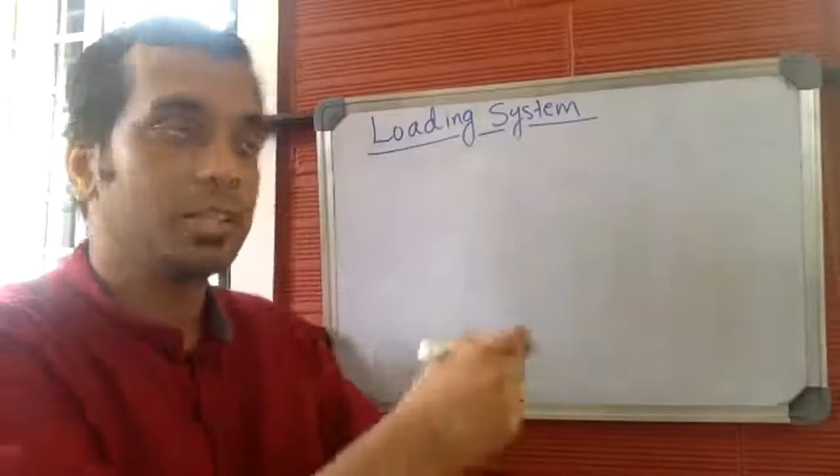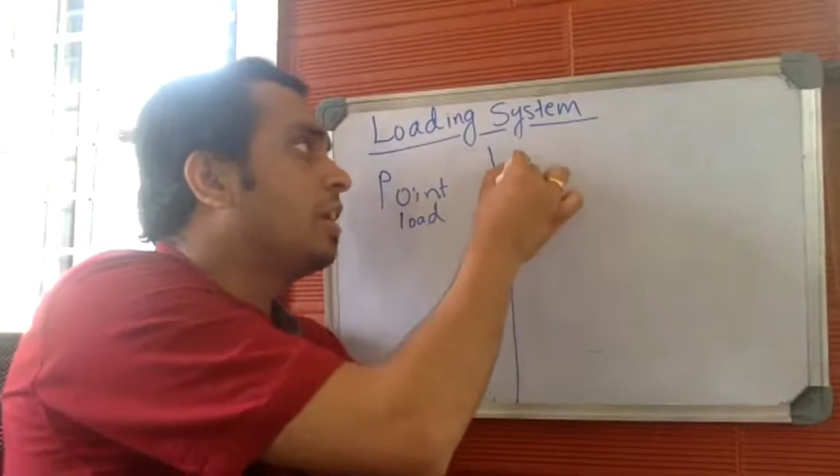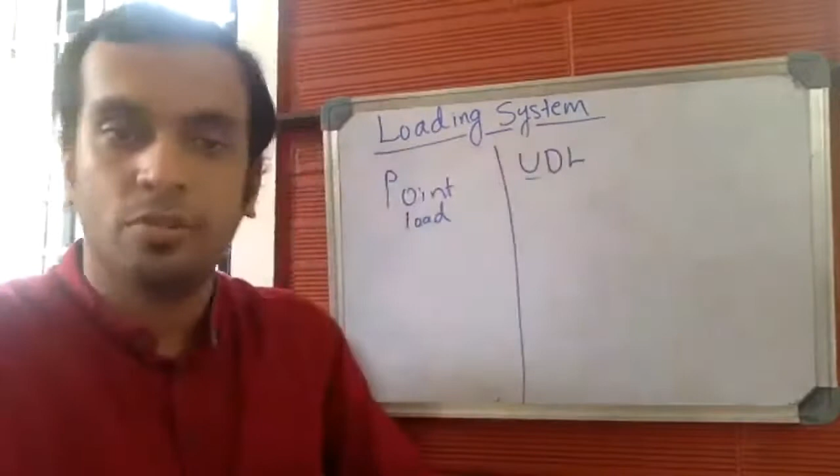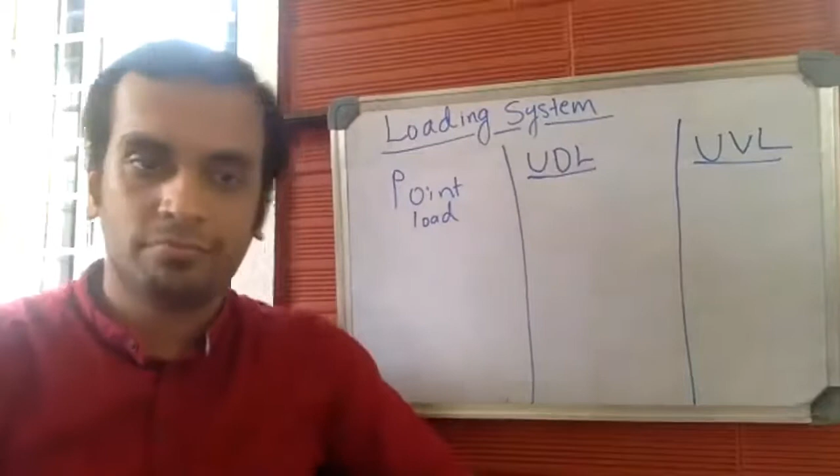So basically, we have three types of loading system. The first type is point load. The second type is uniformly distributed load. We call it UDL, uniformly distributed load. And the third type is UVL, uniformly varying load. So the first type is point load, second type is uniformly distributed load, and the third type is uniformly varying load. These are the three types of loading systems available.

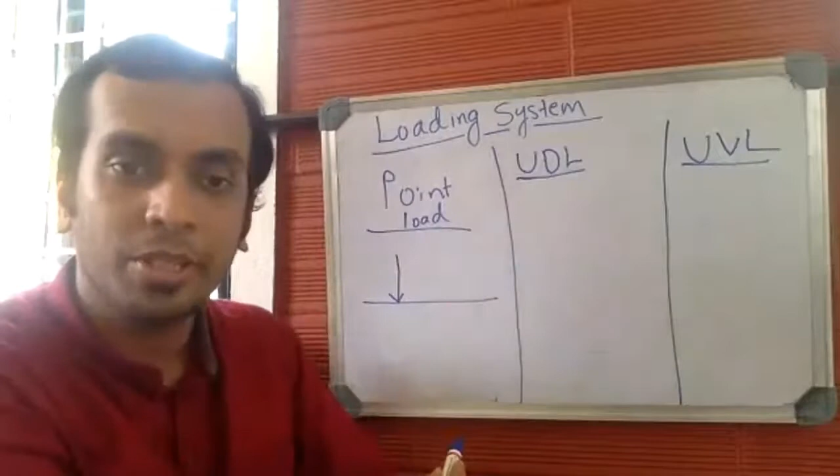So let us start with the first one. The first type is point load. You know what point load is. You went through point load in the previous modules; in the first and second module, you had point loads. Point loads are nothing but forces or loads acting at a particular point, or concentrated on a particular point. It's also called concentrated load.

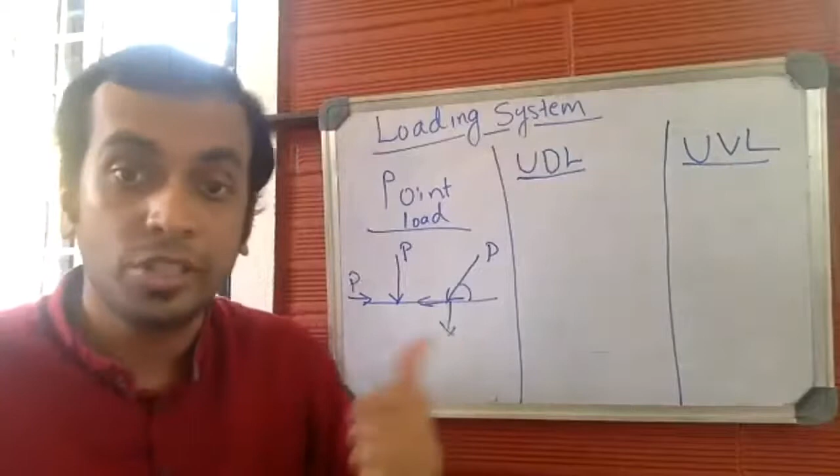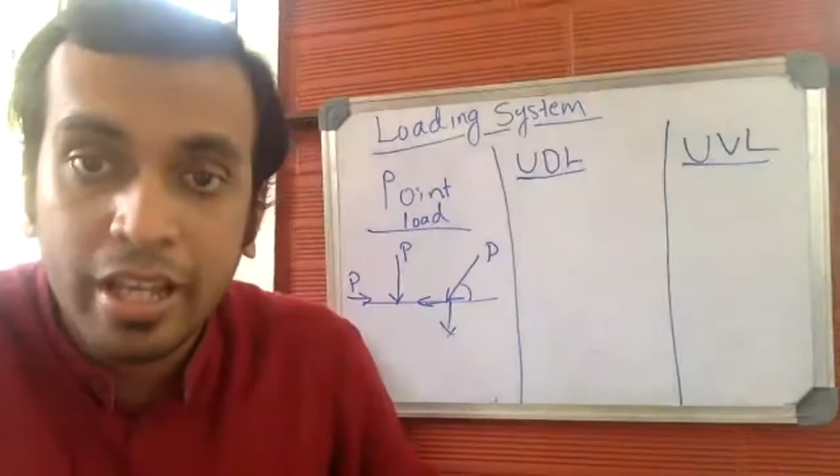It can be either vertical, horizontal, or inclined. You went through this type in the first and second modules, resolving the force into its horizontal and vertical components. If the loading system is a point load system, it's always easy to analyze. You have two more types of loading system. The first of these two is uniformly distributed load. So this is all about point load. Let us concentrate on uniformly distributed load, which is a new concept for all of you. So listen to me very carefully.

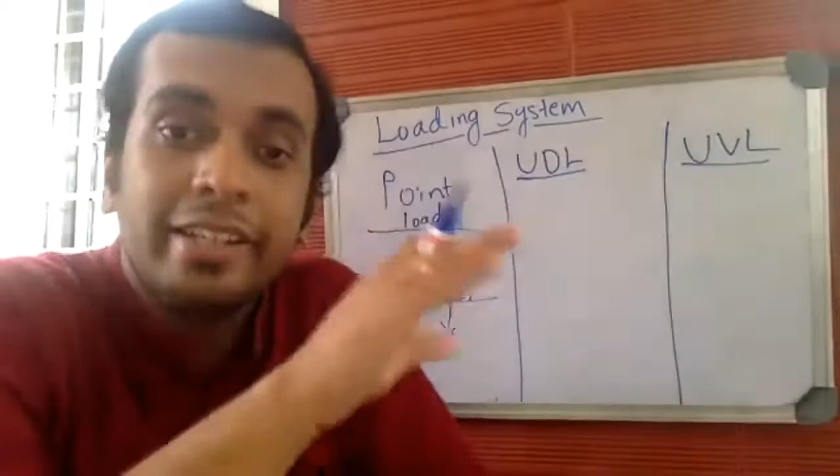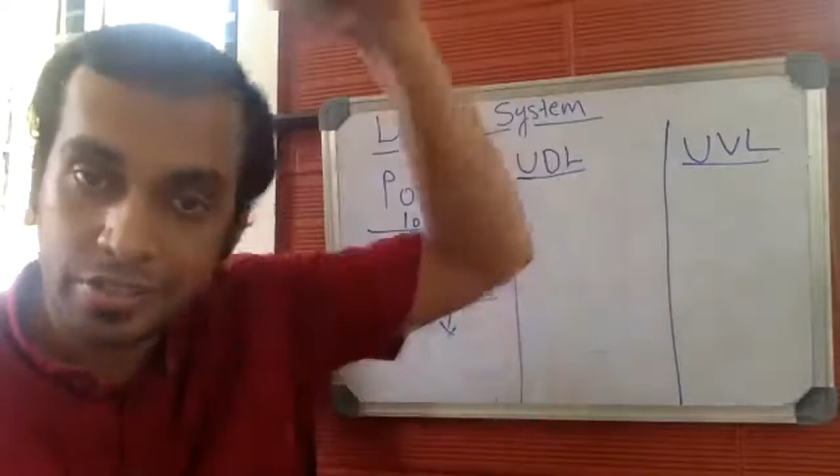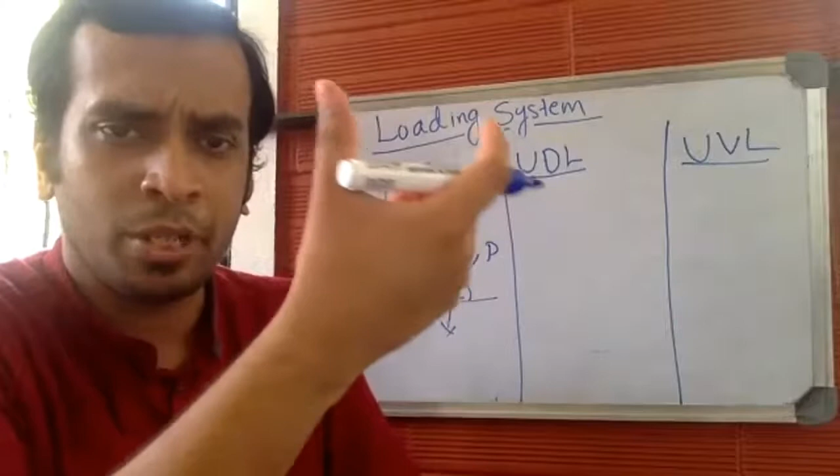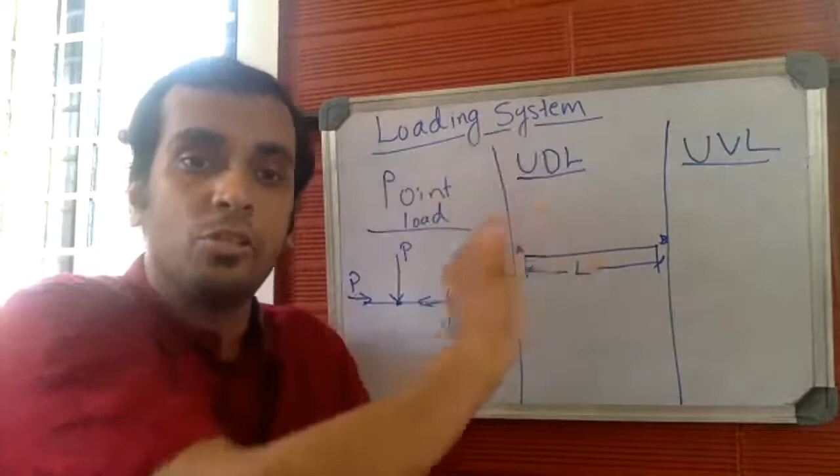The second type is uniformly distributed load. As the name suggests, the load is uniformly distributed. Whereas in point load, the load concentrates on a particular point, here in the case of uniformly distributed load, the load is uniformly distributed throughout the cross section of the beam or throughout a particular span L. Let this point be A and let this point be B. So here, this is uniformly distributed load. The load should be uniformly distributed throughout the span, which we have considered as L, indicated in this way.

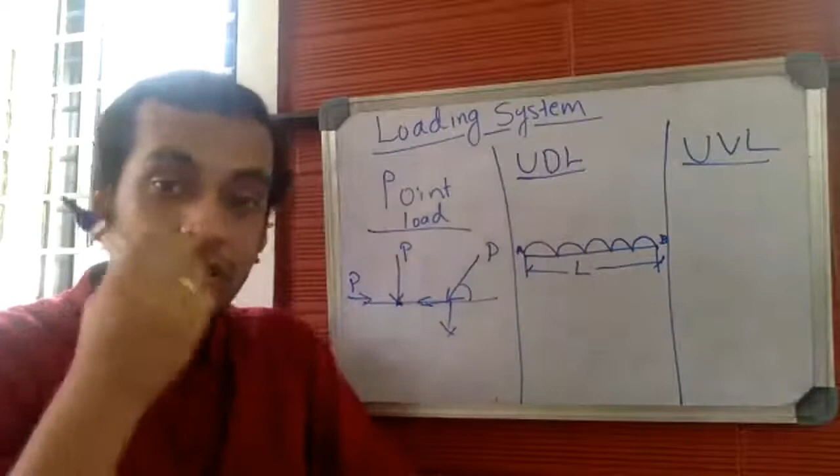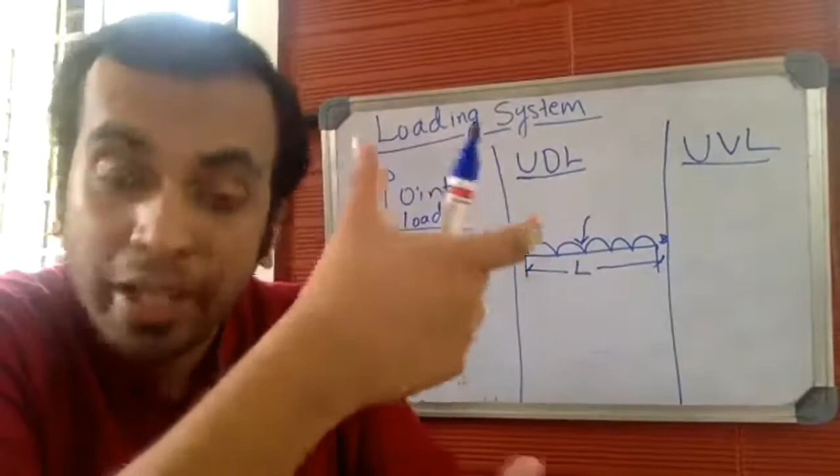Load is uniformly distributed. It doesn't concentrate on or act at a particular point. Instead, it uniformly distributes throughout the given span. So distribution is shown in this way. And here, the rate of load distribution is given. You will not be given the exact magnitude of load, because the load is uniformly distributed throughout the span. That's why you'll be given the rate of load distribution.

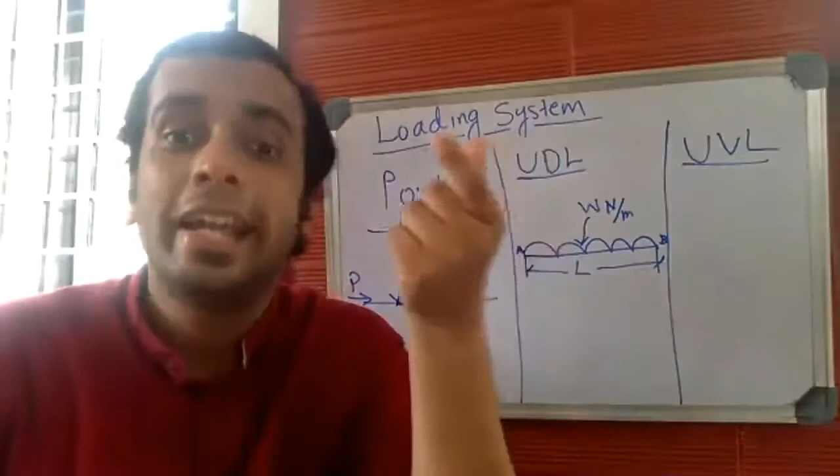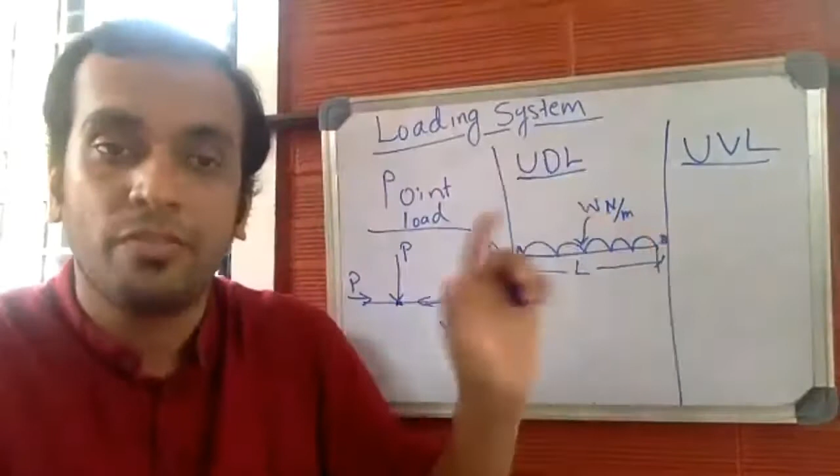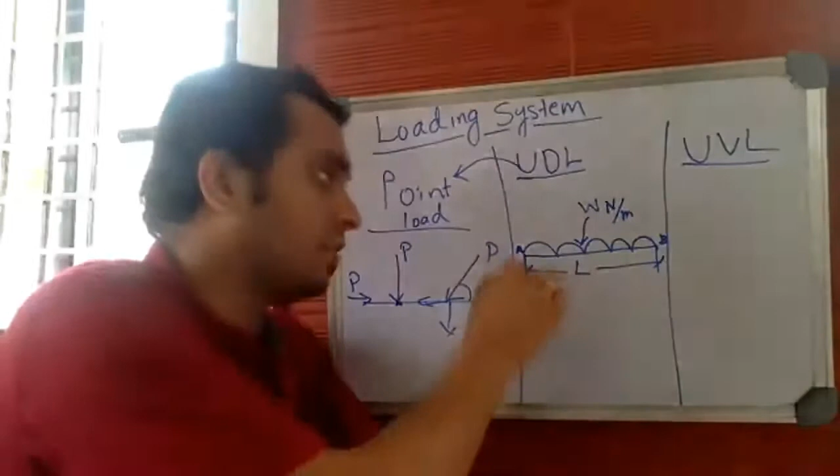Let me consider it as W newton per meter. Newton per meter indicates the rate of load distribution, the rate of the uniform distribution of load. Now, this is how uniformly distributed loads will be given. So if UDL is given, what are we supposed to do? If UDL is given to you, you have to convert UDL into a point load system. Let us convert it. I'll help you to convert.

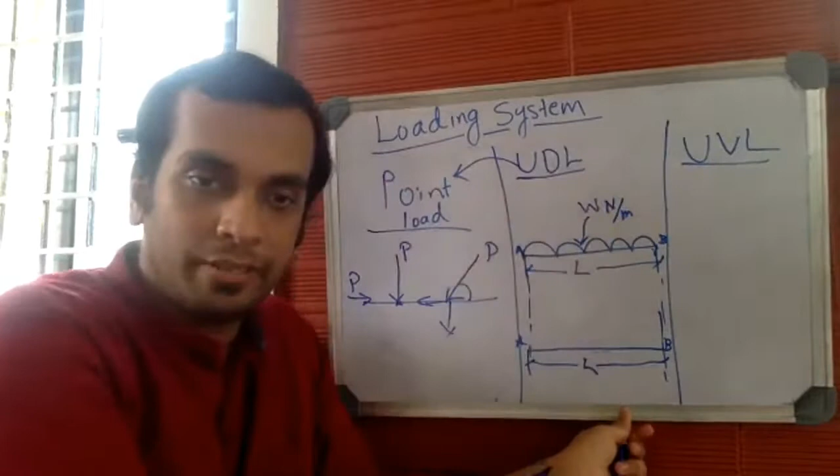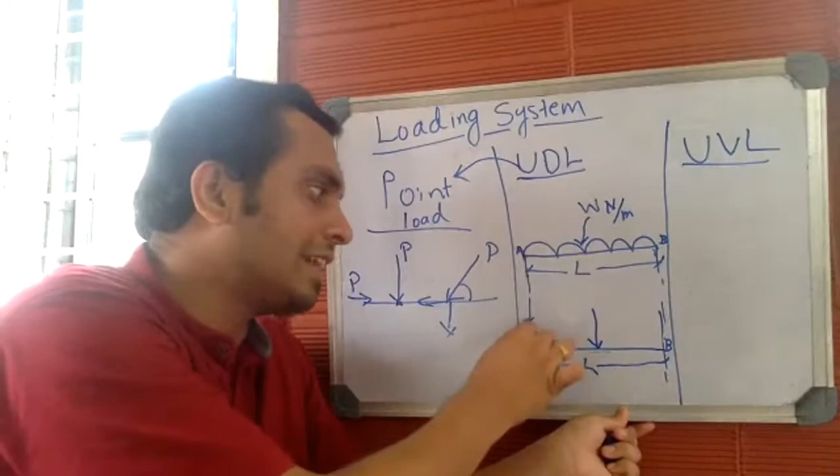Beam AB of length L. This is the rate of load distribution shown here. You have to convert the UDL into a point load, in order to analyze it properly or to make the analysis easy. So this is how you convert UDL into a point load. The point load you convert from UDL should act exactly at the center of the span, so at L by 2.

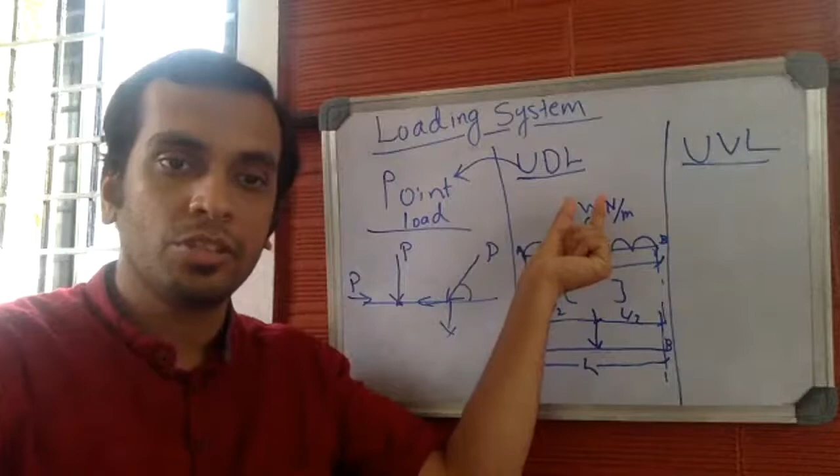And the magnitude of the point load you convert: W is the rate of load distribution, so the magnitude of this point load will be W into L.

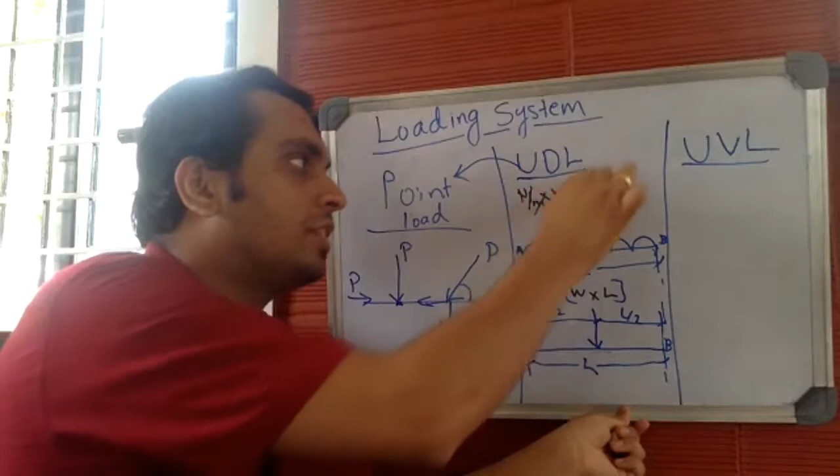Will be W into L. So how is it W into L? W is in Newton per meter, and L is in meters. So this gets cancelled and finally you will get the load in terms of Newton. This is the magnitude of point load. This is how you convert from UDL.

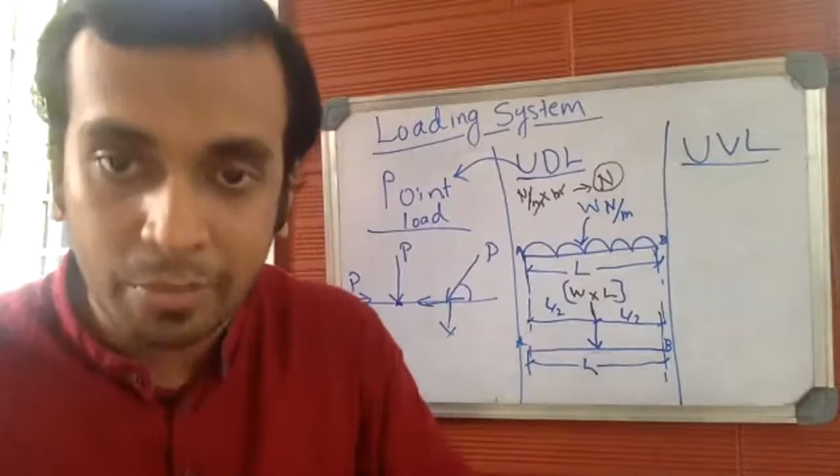So if UDL, uniformly distributed load, is given in the problem, you have to convert UDL into a point load. This is how you convert UDL into a point load. The point load which is being converted from UDL will act exactly at the center of the span. So this will be L by 2 and L by 2. And the magnitude of point load will be the rate of load distribution, W, into the span length L.

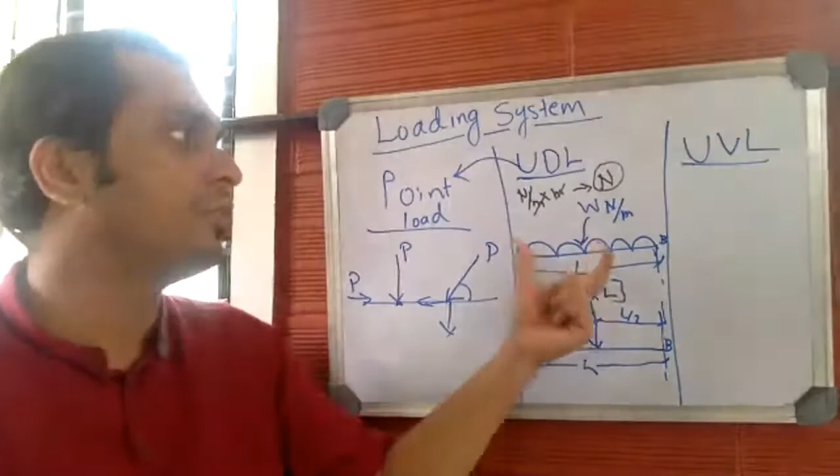So if UDL is given, you have to convert UDL into a point load. So this is all about uniformly distributed load. Now let us go through uniformly varying load, the last type.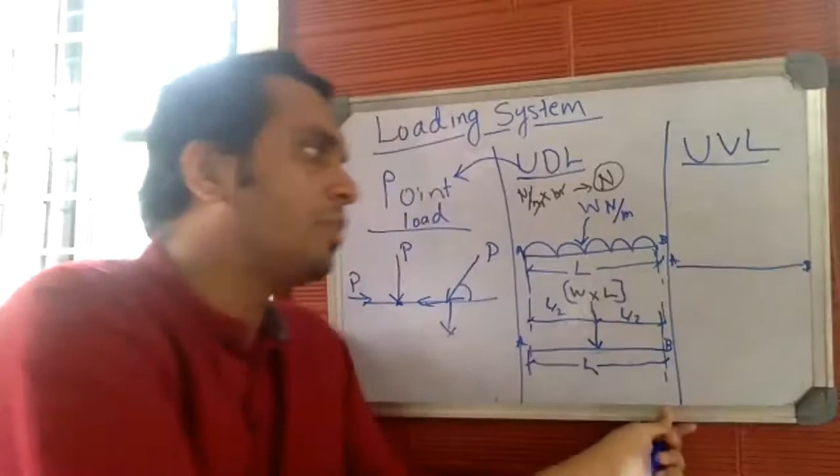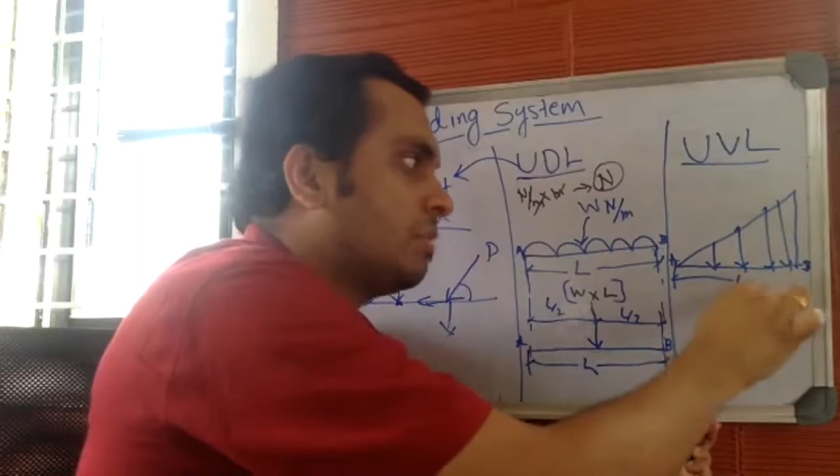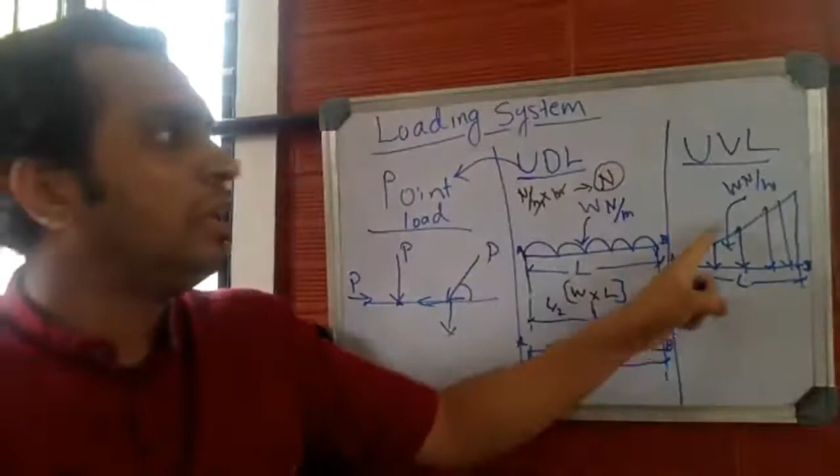Uniformly varying load. Let me consider another beam cross section, AB again. In UDL the load is uniformly distributed, but here the load is uniformly varying. It varies uniformly throughout the cross section and it will always be indicated in this way. This is a beam of span length L. W will be the rate of load distribution, W Newton per meter. Here the load increases from point A to point B in a triangular pattern.

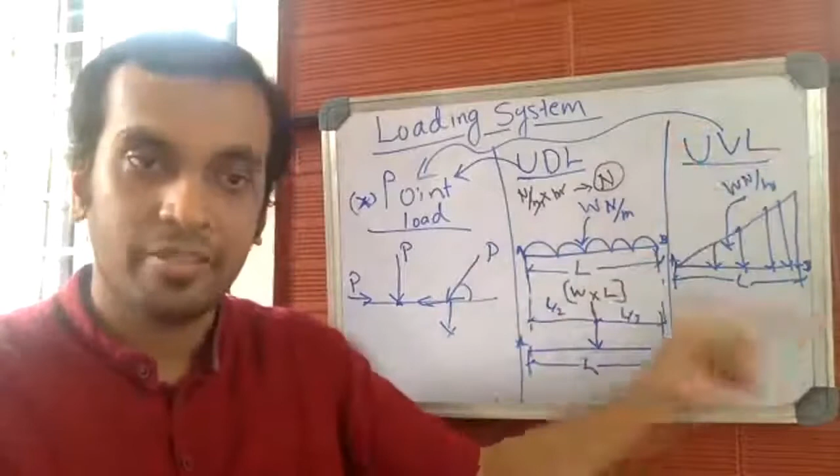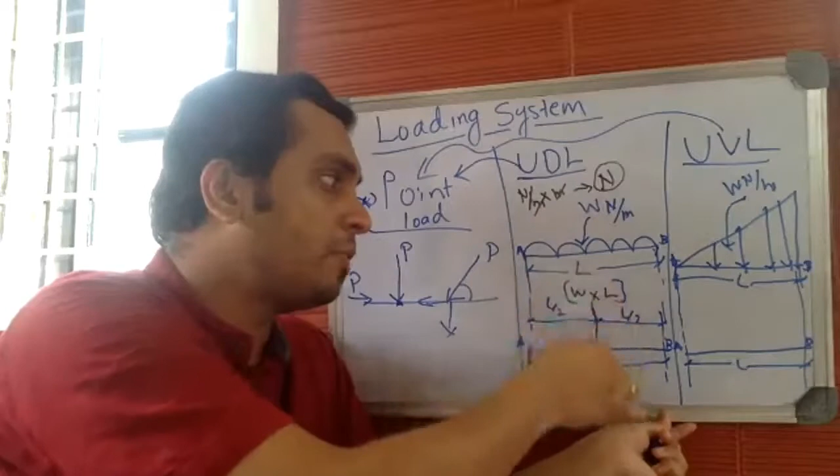So if you have UVL, let us understand how to convert UVL into a point load. Let me consider the same cross section again, AB of span length L. In UDL, the converted point load would act exactly at the center. But here it's not the case. It will not act exactly at the center. It will be acting at a distance of 1/3 from base and 2/3 from apex.

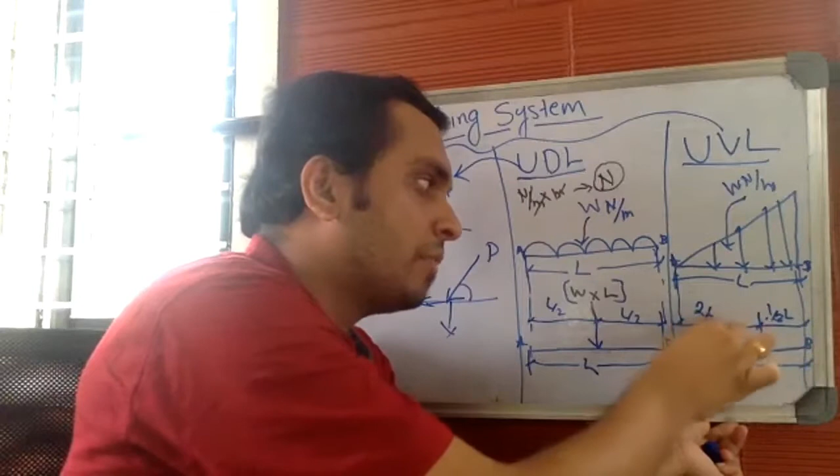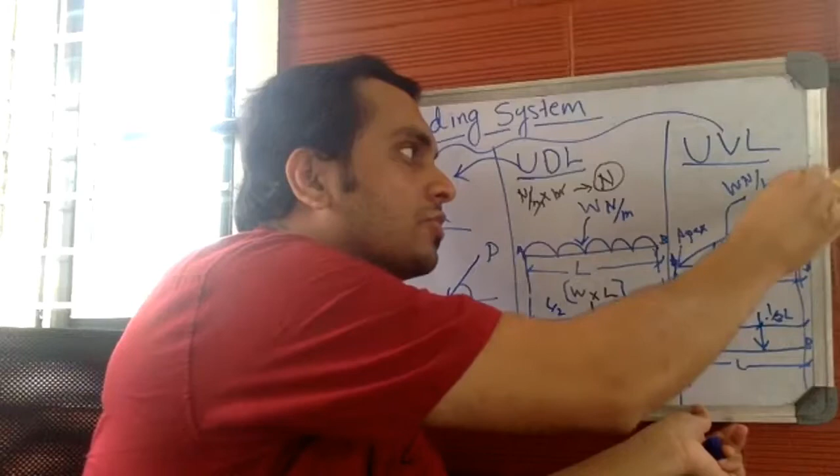So if this is a triangle, I'll let you know what base and apex is. This will be the apex and this will be the base. So the point load acts at 1/3 of L from base and 2/3 of L from apex. In UDL it acts exactly at the center, but here it acts at a distance of 1/3 from the base and 2/3 from the apex.

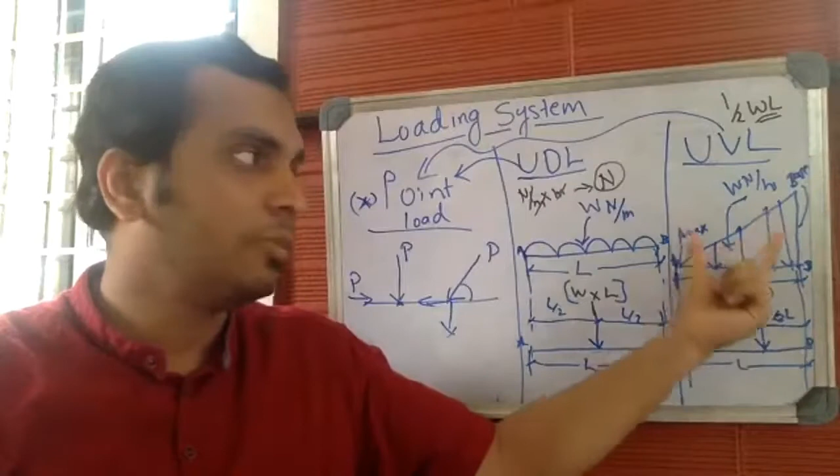This is the point load, half into W into L. Half into W into L is the area of the triangle, half into base into height. Hope this is clear. This is how you convert all the loading systems into point load. A point load acts or concentrates at a particular point.

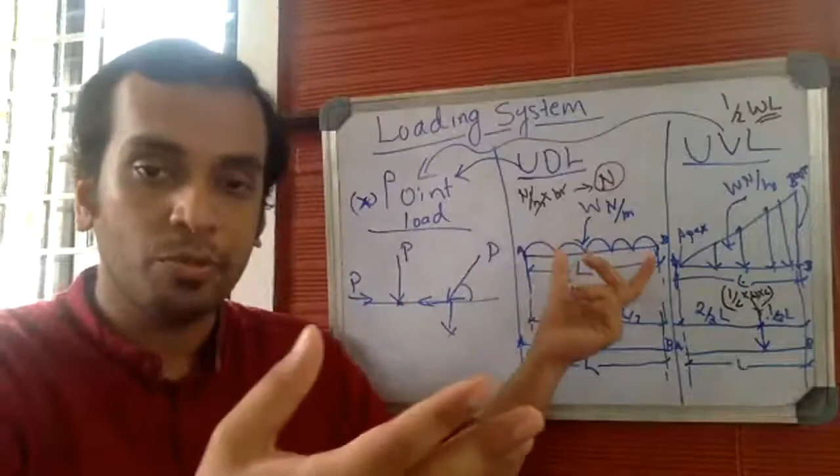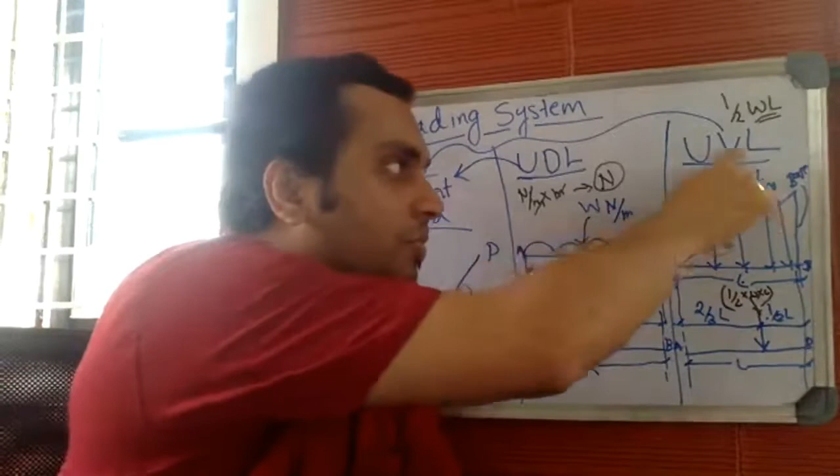UDL is a type of loading system where load is uniformly distributed across the section. If you have UDL, you have to convert it to a point load, and its magnitude will be the product of the rate of load distribution and L. If you consider UVL, again you have to convert uniformly varying load into a point load, with the apex and base, and its magnitude will not be W into L, it will be half into W into L.

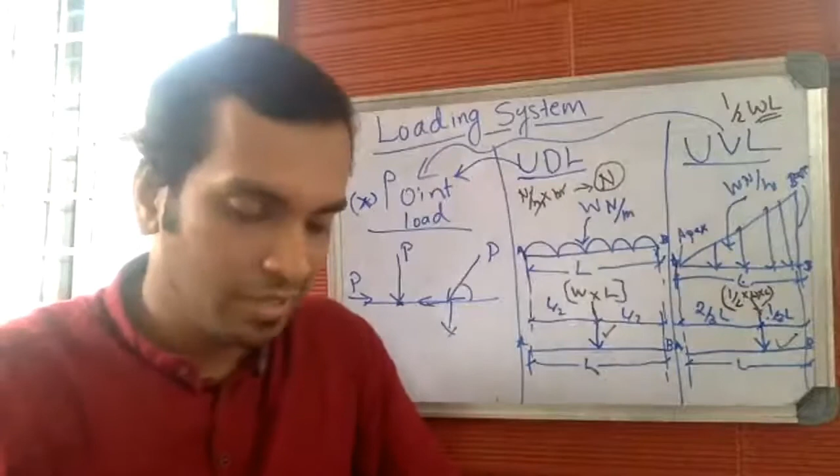This is the point load converted from UVL, and this is the point load converted from UDL. So finally, everything should be converted back to point loads. So these are the three types of loading system.